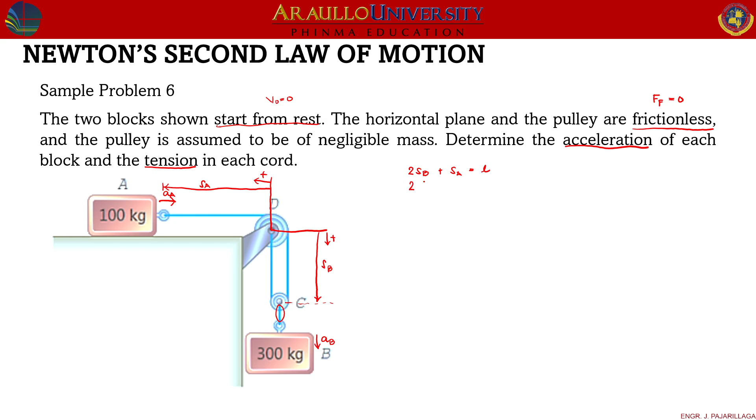So if we want to write our position coordinate equation, this will be 2sB plus sA is equal to the length of the cord. Taking the first derivative, sorry, this should be B, you have 2vB plus vA is equal to 0. Taking another derivative of this, you have 2aB plus aA is equal to 0. Therefore, aB is negative 1/2 aA.

Okay, now, we should observe this. As you can see here, on the side of B, our acceleration is in the same sense as our positive side. So kung pababa yung positive distance, pababa yung acceleration. Remember, ang sabi sa atin nung nagdi-discuss tayo ng rectilinear motion, kapag ang distance ay going further, therefore that is a positive distance. If our distance is positive, our velocity is also positive. Likewise, if our velocity is increasing, our acceleration is positive.

So bakit ko sinasabi 'yon? Because here, for A, the direction of our acceleration is opposite doon sa ating positive sense. Therefore, our acceleration of A is always negative. We can rewrite this as aB is equal to 1/2 aA. This is now the relationship of the two motions. Always observe this kasi kadalasan tinitigil na dito yung pagsosolve, which causes an error. That's why you need to analyze the motion again.

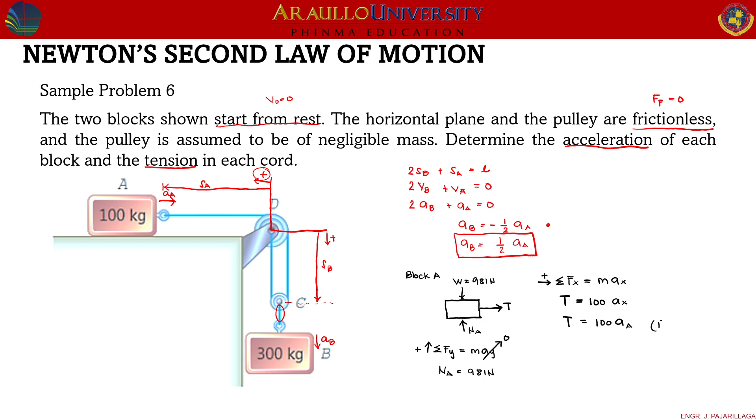For our second equation, we can now analyze block B. So for block B, nakahang lang si block B, merong weight na nag-a-act dito, which is 300 kg multiplied by 9.81 or 2,943 Newton. And doon sa taas, may humihila sa kanyang TB. TB, which this TB is equivalent sa dalawang tension. Diba? Dahil dalawa ito. Okay? So, yung TB na nag-a-act dito is equivalent sa dalawang tension.

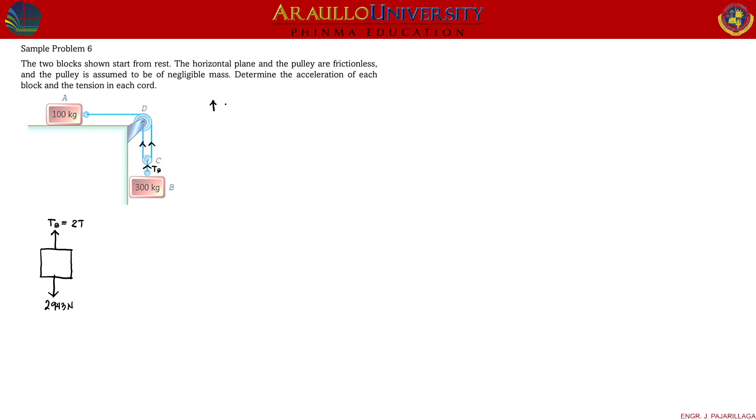Right? So, writing the equation of motion dito, since Y lang naman yung ating mga forces, so the summation of forces on Y is equivalent to MAY. Substituting the value, again, our positive sense of acceleration is going downward. Therefore, our positive force is yung 2943. So we have here 2943 Newton minus T is equal to the mass na 300 multiplied by AY. In this case, ang AY natin is the acceleration of B. Okay? Let me correct, this is supposedly TB. T sub B.

Sabi natin, TB is equivalent to 2T, therefore this is 2943 Newton minus 2T is equivalent to 300 AB. Pero we have solved for T kanina, that is 100 AA. Substitute na lang natin. 2943 Newton minus 2 times 100 AA is equivalent sa 300 AB. Okay? Then may dalawa pang unknowns. Sabi natin, AB is 1/2 AA. So, substitute ulit natin yan. We have here 2943 newtons minus 200 AA is equal to 300 multiplied by 1/2 AA.

We can now solve for AA equivalent to 8.4 meters per second squared. Okay? And then our AB is 1/2 ng AA. So we have 4.2 meters per second squared. We can now solve for the tension. The tension on the cable is 100 multiplied by AA, 8.4 meters per second squared. Or our tension is 840 newtons. For our tension at B, that is 840 times 2, 1,680.

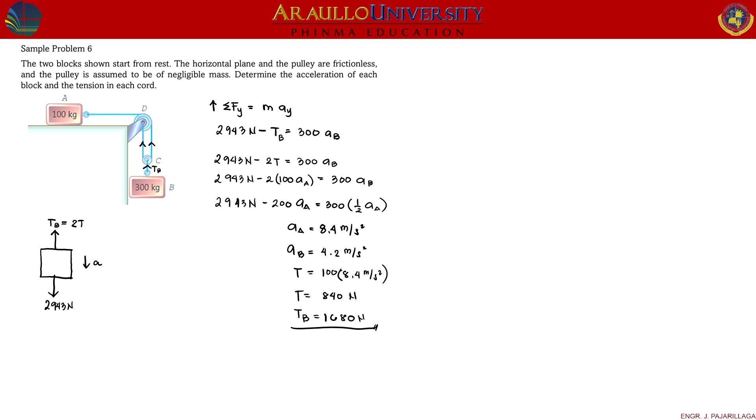So for our last sample problem, dito tayo sa medyo komplikado. We have here, sabi dito, block A has a mass of 40 kilogram and block B has a mass of 8 kilogram. The coefficient of friction between all surfaces of contact are mu s is equivalent to 0.2 and mu k is equivalent to 0.15. If P is equal to 40 Newton, determine A, the acceleration of block B, and B, the tension in the cord.

So here again, meron na naman tayong problem involving the absolute dependent motion analysis. Actually, you can also solve this using the relative motion. Either way, pareho lang naman ang resulta. Okay, so solve na lang natin using absolute dependent motion analysis. So here we have block A and block B. Both has a mass. Si block A 40, si block B 8. Now, we are given, binigyan tayo ng dalawang coefficient of friction. Okay? Yung isa ang subscript ay S, yung isa ang subscript ay K.

What is the difference? S means static friction. Ibig sabihin, hindi gumagalaw yung ating system. And then K naman is the kinetic friction. Ibig sabihin, gagamitin natin ito kapag nagsimula nang mag-move yung ating system. Now, how do we determine kung gagalaw ba or hindi yung ating system? So, para malaman yon, we have to use the concept of statics. So, according to statics, di ba, kailangan nating hanapin yung force na magko-cause sa kanya ng motion. And that is what we should do first. Okay? Hanapin muna natin kung ano yung magko-cause ng motion.

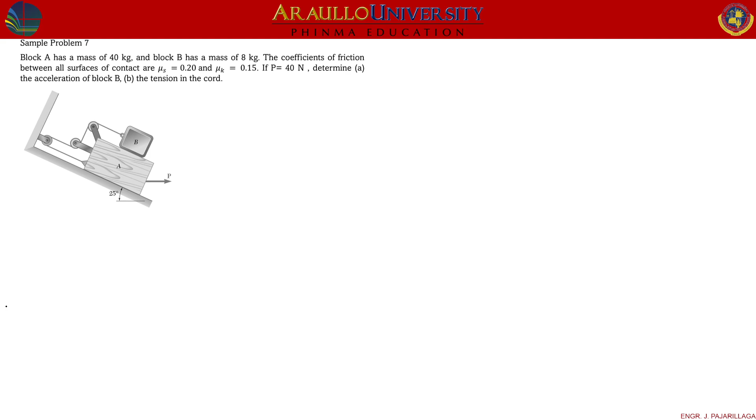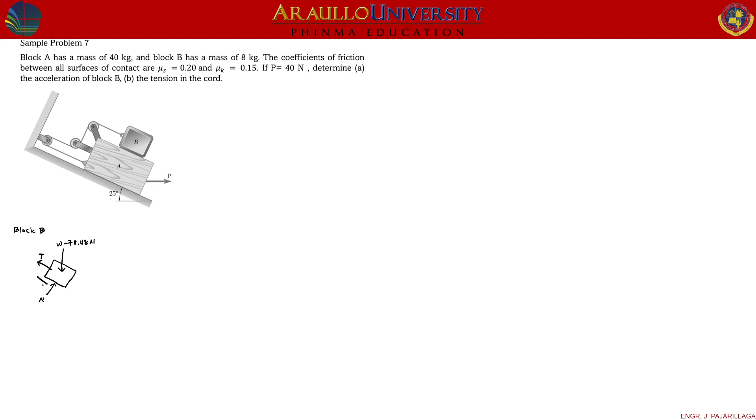Okay, so unahin ulit natin kay block B. Same method lang, pero sa halip na summation of forces is equal to 0, this time, summation of forces is equal to MA na. For block B, we have here the weight equivalent to 78.48 Newton, the normal force N, and then the tension here. Since merong movement, therefore there is FFB here. This is NB, this is FFB.

Pagpasensyahan nyo na yung pen ko, hindi ko siya alam iliit ng size. Parang default lang yata.

Okay, so this is FFB, this is NB. Similar lang naman ng free body diagram. And since rotated yung plane, i-rotate na rin natin yung axis. This is our Y, this is our X, and this is 25 degrees. So, since hindi tayo pwedeng mag-summation of forces on X is equal to MAX dahil wala pa tayong value ng friction, we can first look at the equation of motion along Y, which is equal to MAY. Pero wala itong motion sa Y-axis, therefore this is 0, which will yield the same result as this one.

Our NB is 71.127 Newton. Pero si FFB is hindi na the same. Bakit? Since kinetic friction na yung gagamitin natin, FFB is now 0.15 NB, which is 10.669 Newton. So we now have the value of FFB, and we can proceed with the equation of motion along X. The summation of forces on X is equivalent to MAX.

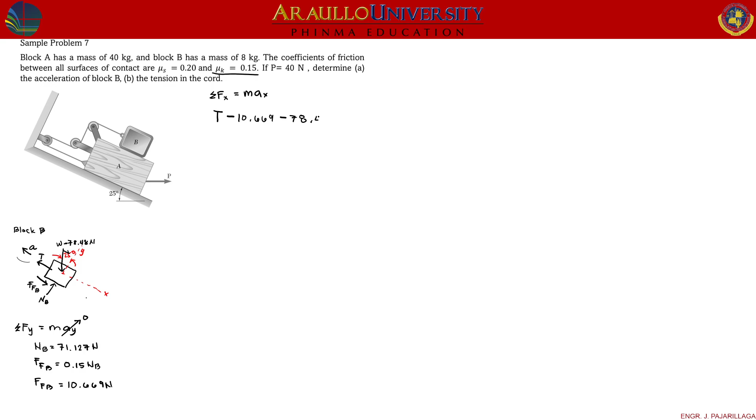So here we can now write our equation of motion. Unahin natin yung forces in the same sense as our acceleration. We have T, minus FFB 10.669, minus yung component ng X kasi papunta rito, minus 78.48 sine 25 degrees, and that is equal to the mass of our block, which is 8. Since yung direction ng acceleration is opposite of our positive sense, this will be a negative acceleration on block B.

So we can now simplify here in terms of T and AB. T is equal, pag inilipat ko, positive 10.669 plus 78.48 sine 25, which is 43.836 Newton minus 8 AB. This will be our equation number 1. We'll go back to this later on. Puntahan muna natin si block A.

So for block A, ano-ano yung forces natin? Hindi ko na isasama ito kasi magka-cancel out lang yung mga tension dito, so yung hindi maka-cancel out na lang ang ilalagay ko. Let me change the color para iba yung kulay. First, we have the tension, na hindi pa natin alam. Then the NB, yung normal force sa B, which is 71.127. And dito, yung friction in the opposite sense, 10.669. Before we proceed, idodraw ko muna yung axis. So this is Y and this is X.

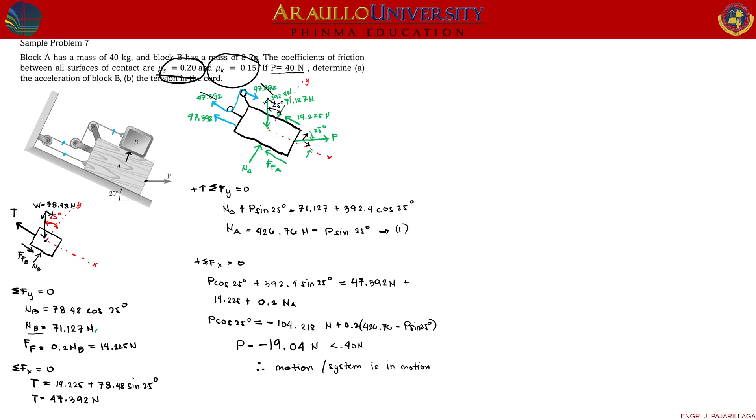So, again, if binigyan kayo ng problem ng static friction, you have to check first. Baka kasi minsan, hindi naman gumagalaw yung object, pero ina-analyze mo ng kinetic. So you have to analyze it first on the static. The other clarification is siguro probably wrapped in here.

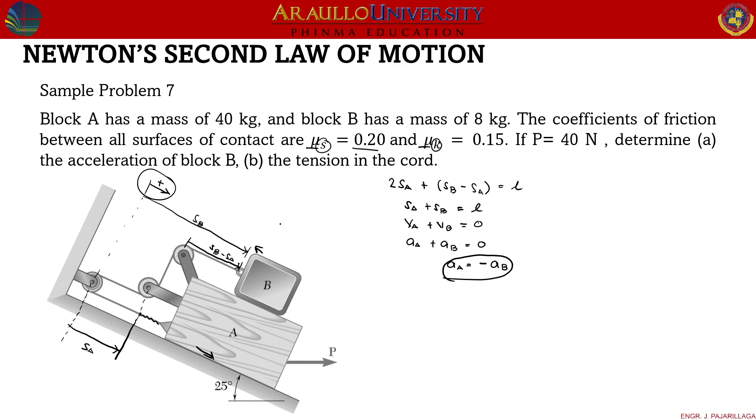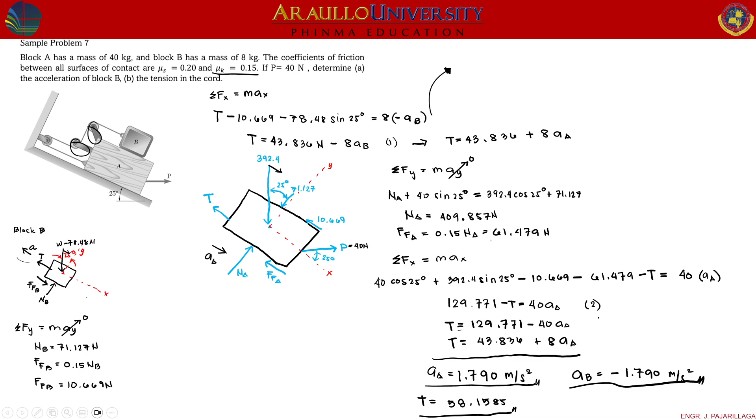So the reason kung bakit negative AB, kasi the positive sense of our acceleration is going down, from our initial computation. Ito. Since positive yung ating direction dito and ang consideration natin on this one is opposite that one. So kabaliktaran ng ating positive, we write negative here. So yun lang naman. That would be all for this topic. We will proceed on equation of motions under normal and tangential coordinates next week.